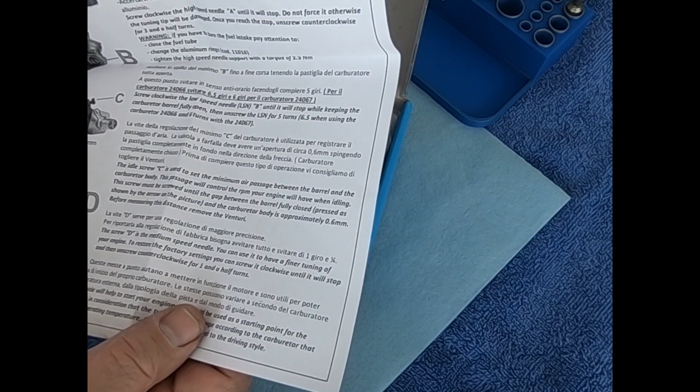This was opened previously, so let's get that out of the way.

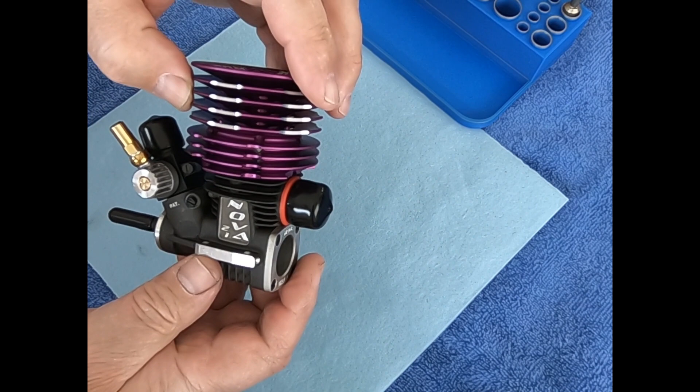It's a nice looking engine. I see it has the offset carburetor, six head screws.

I'm not quite sure why they go to six head screws. I'm sure it holds better, though I don't know if I've ever had a problem with four not holding good enough, but there could be a reason. The old 8-port Novarossi had that on some of the 821 models - some had it, some had the 4 bolt. That 821 was a really good engine, 8-port, but it had really good torque for a truggy.

Looks like the standard carburetor that's been coming with a lot of engines lately. Obviously it's a different block when it has the offset carburetor - you can see the carburetor's not centered like on most engines.

I don't know where the needle on this carburetor goes. This one looks to be really far in from flush - that's probably a starting position. Most Novarossis you kind of run flush on the end, so this one's a little different.

I see it says 7 transfert - that's 7 ports. It's probably just a little translation from Italian to English. So we'll get it taken apart.

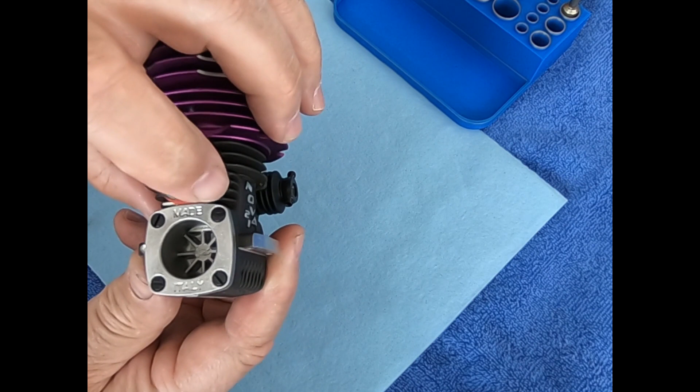With the Novarossis using flathead screws, it's really important when you're working on these to have a good screwdriver. The one that works for the backplate can be a little cheaper, a little smaller for those screws, but for the head screws you need to have a good one.

My good one I got at Fleet Farm - that's kind of a Midwest thing - but I think it's made by Wiha, W-I-H-A. It has a really nice hard tip, and it's the right diameter to fit down in there.

I've gone through a lot of screwdrivers in the last few years. It's hard to find a good one that lasts, because I wish they wouldn't use these - I wish they'd use a regular Allen head screw instead, because a lot of people have trouble with them. I get engines in for a rebuild and they're stripped, and sometimes I've had to actually drill - I have a little sleeve I use to drill the screw out if I have to. It's kind of a pain. I wish they would just go to a regular Allen head screw.

But we'll get this one taken apart and see what's inside.

Okay, I got the head bolts out of it, and it's time to take the head button off. Actually this one came off pretty good - sometimes they're really tight on there.

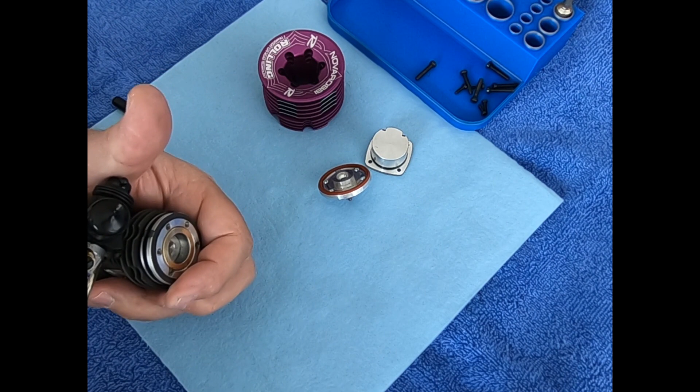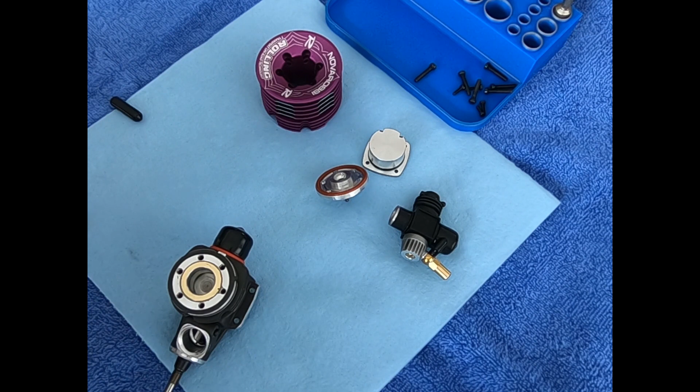And take the carb off here. Maybe the sleeve will come out - sometimes the sleeve with just a pinch will come out. This one didn't, so we'll hook the exhaust port here with the zip tie.

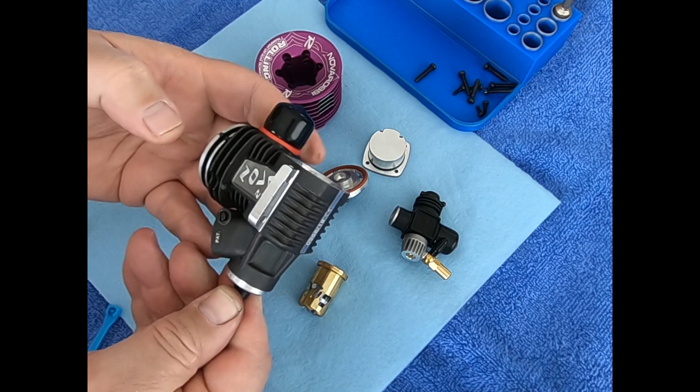Push it up - sleeve out, piston out, and the crank out.

So this has a weighted crank. Like I said on the head, it's a 7-port - that's counting these two small slits, the transfer ports, the boost.

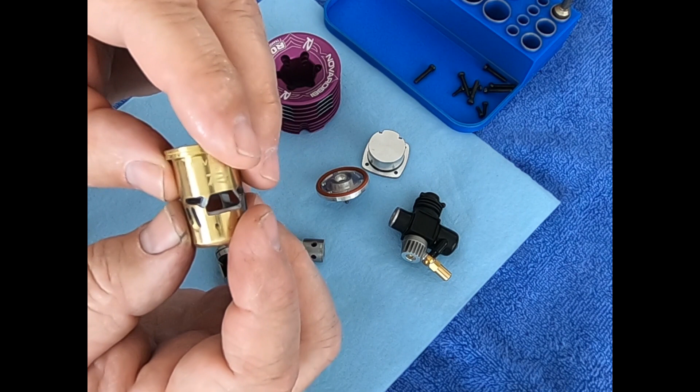Now this engine, looking at it, seems similar to the Bonito, probably the original super long stroke design. By super long stroke, this is a 15.9 diameter piston with a 17.6 stroke, so the crank has a longer stroke than most other engines - something like a P5 would have quite a bit less stroke.

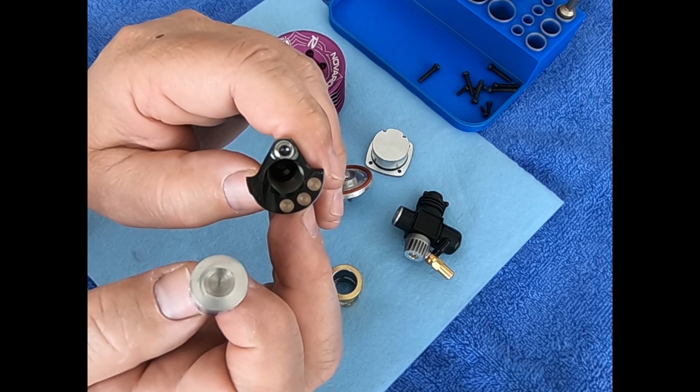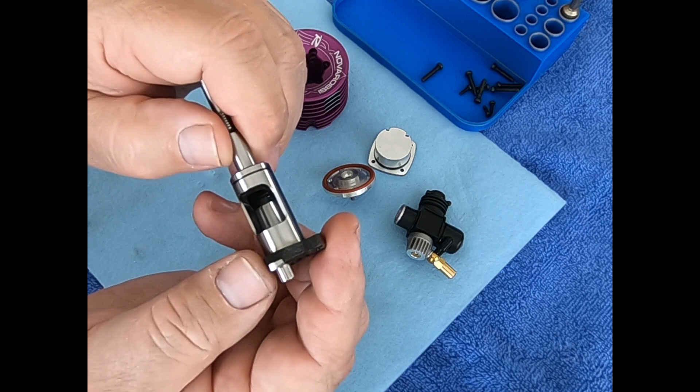This also has - I don't know if you can tell by looking at it - a 14.5 millimeter crank, like the kind of standard crank, whereas some Novarossis like the P5 have a 14 millimeter crank. This is 0.5 millimeter larger, which takes a different bearing in the block, but I don't know if there's really any downside to the larger crank.

I think it was originally made for their on-road engines so they could have a bigger bore in the crank. This one does have maybe a 0.5 millimeter larger bore in it than something like a P5, but again, like I've said on some of the other engines, I'm not sure what they're using for weight with the weighted crank.

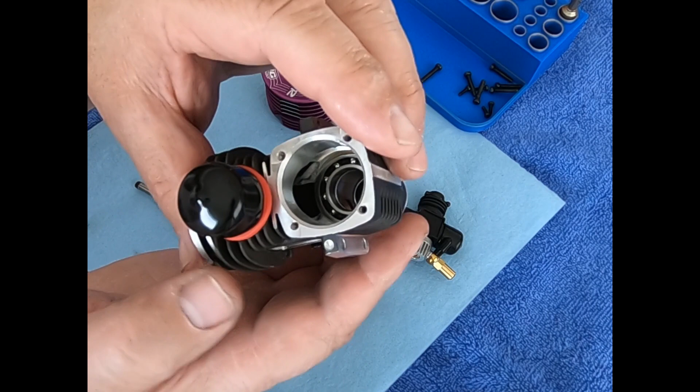Hopefully it's something that's heavier than the steel. This one is a steel bearing, steel rear bearing, and the Novarossi double sealed front bearing. I do kind of like that bearing. It's fairly expensive from the factory, but it has 2 seals on the outside and then no seal on the inside, so it does do a good job keeping the dirt out.

You still need to replace it, and it lasts a little bit longer than some standard bearings, but this one doesn't look like it has... yeah, this one has the standard rear bearing.

There's a couple things I don't like about Novarossi, one of them being they went to a special rear bearing, and the inner race is thinner on some, and then there's a boss behind the bearing. If you use a standard bearing, the inside and outside dimensions are the same, but the race is thinner, so you can't just put a standard 14.5 millimeter bearing in there. You have to buy the bearing from Novarossi.

There is a manufacturer, TKO, that makes a replacement. They're a little more expensive than some standard bearings, but about $35 isn't too bad. They make it for one of the sizes, but I can't remember which, because they do it on both the 14 and 14.5 millimeter cranks. So that's something to look out for.

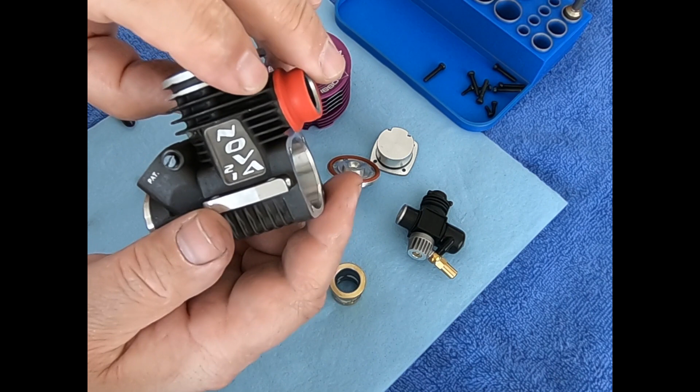This is kind of different—it's machined out right here for their logo. I'm not really sure why that is on that side. Like I said before, the crank, or the carb, is offset, and so the crank is different also. If you look at the crank, I'm not 100% why they did the offset.

I mean, obviously, you do something different, it's cool, it sells more. But I think when they first did that, it was on the on-road engines. My theory on that was you get a better balance with the crank because your crank window is kind of lined up with your crank pin, so the weight is better for the balance. You're lighter on the top side because you want your weight to offset the piston. At the bottom of the stroke, it's offsetting the piston, so I think they did it for a little better balance on road, high revving engines.

And then they already obviously got the blocks and stuff, so it doesn't really cost them any more to use that block for a different engine. Novarossi cranks are generally good quality—the crank pins wear well even on the uncoated ones, so cranks and rods are pretty strong.

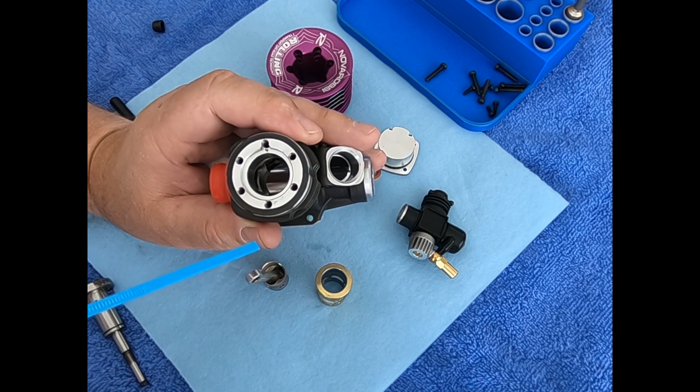I'm not sure what the part numbers are on these, but you can't take a crank from a different engine that doesn't have the offset carb and use it in this one—it has to be from an offset carb. One thing they do too is the notch for the sleeve on a lot of engines is either on the exhaust port side or the intake side. On these, to prevent you from using a different bore and stroke in this engine—I think the Bonitos are that way too—they offset it to the side, and it doesn't really affect performance. You just have to be careful when using parts from different engines.

Going back to the sleeve, I always kind of thought that was neat, the way they do the bypass port. If you don't know what a bypass port is—the piston's going up and down, and we're centered there—so the piston, as it goes down, lets air out from underneath it, and it gives it that little bit of relief since there's dead space underneath the piston otherwise. So as the piston's going down, the air comes out and gets in with the intake charge there. I've always kind of liked that.

There's a lot of engines that don't have bypass ports anymore—they're kind of getting away from that—but I was always kind of a fan of the bypass port. It's a little more machining, especially in this one; they're kind of relieving it there. It's a 3-port exhaust. There's pluses and minuses to that—it usually adds top end to an engine.

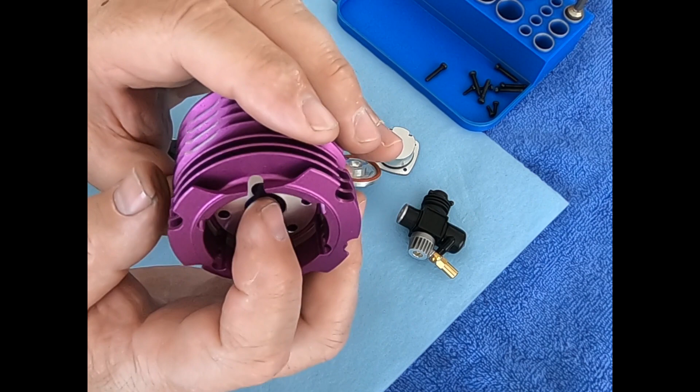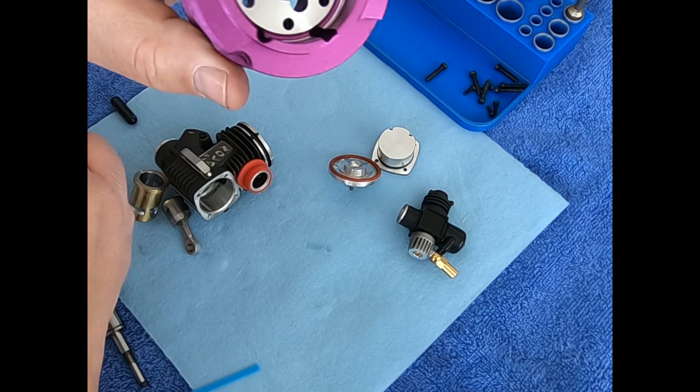Going to the head, this is probably one of the lower heads that Novarossi makes. They have some clearances cut in it for exhaust and carb side. Pretty nice, they're a pretty nice head. Cool. Nothing too fancy on the back plate here.

You'll notice the cut's a little bit deeper because the stroke is longer on this engine, where the piston comes down farther, so there's a little deeper notch in that. Going to the carb.

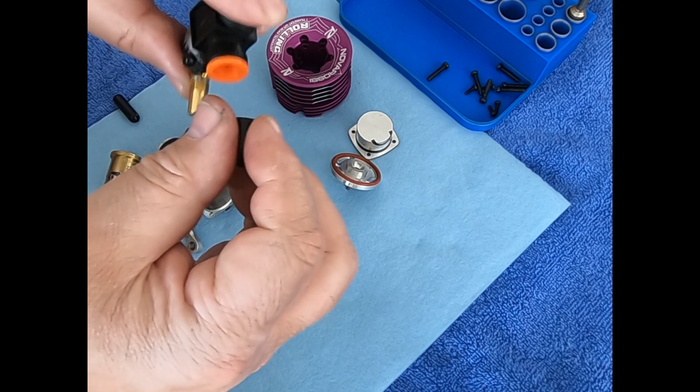7mm restrictor. Looks to be a long low speed needle carb. Pretty standard for the Novarossi. They look to have changed this a little bit.

Some of the older Novarossi carbs didn't have the third needle. That's just changing your spray bar adjustment. So if you were to screw this in a half turn, and if the thread pitches were the same on the low speed needle, it'd be equal to adjusting the low speed needle. Sometimes you can get the spray bar in a little bit more, so you need to work together with the low-speed needle, and there is some differences.

I have played with it on a carb before, and it did make a tuning difference, but it's not a drastic change. You're better off, unless you're really experienced and want to play around, leaving that alone.

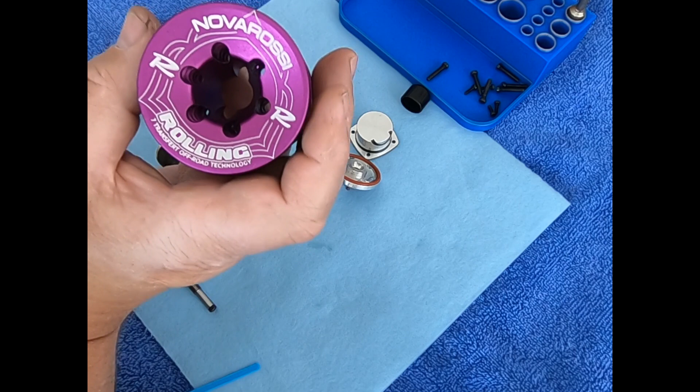Well, I guess that's about it on this. I did a little research. These I saw priced between $219 and $265.

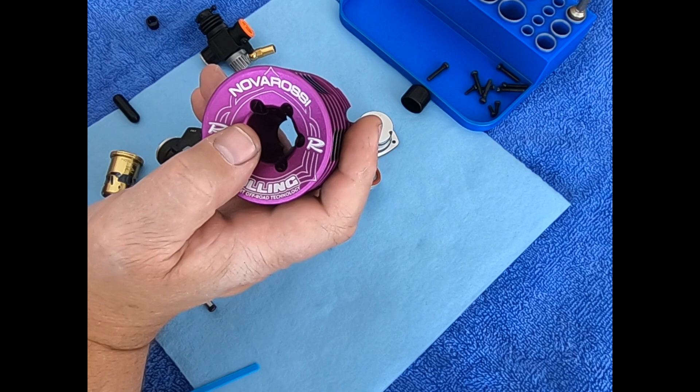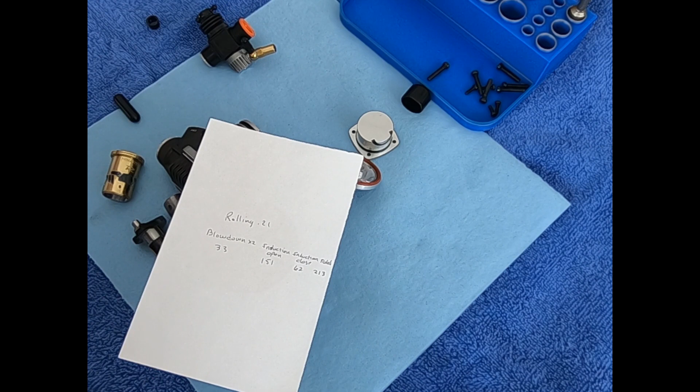This engine, to me, I guess we'll go through the timing numbers now. Some of the higher end Novarossis do have some nice induction numbers.

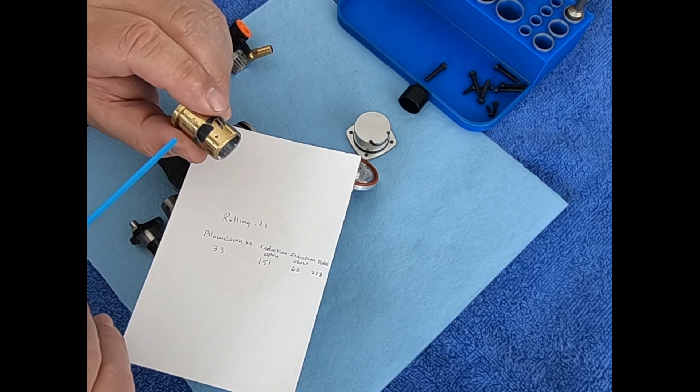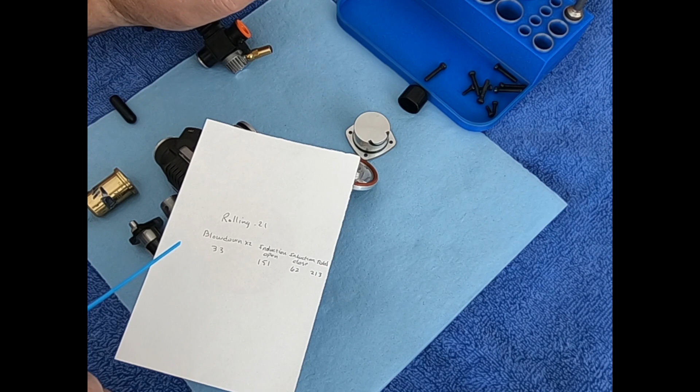So the blowdown, which is the degrees between the exhaust port and the transfer port - some people take that number times 2, but it depends on what program you're using. I'm getting 33 degrees on this engine, which seems kind of low. I like to be up in the 40s, but it does have a pretty wide exhaust port that plays into that too.

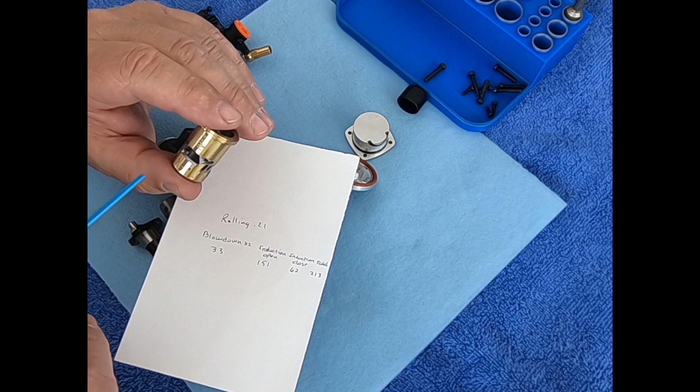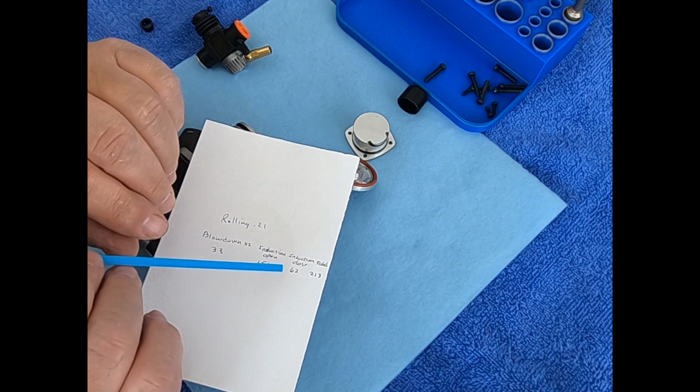But I like to see probably in the 40s with that. What that will do, you put it up into the 40s, will give it more top end. So this, as it is, should have just a stump puller. Opening is 151, closing is 62 degrees, for a total of 213, which is pretty good.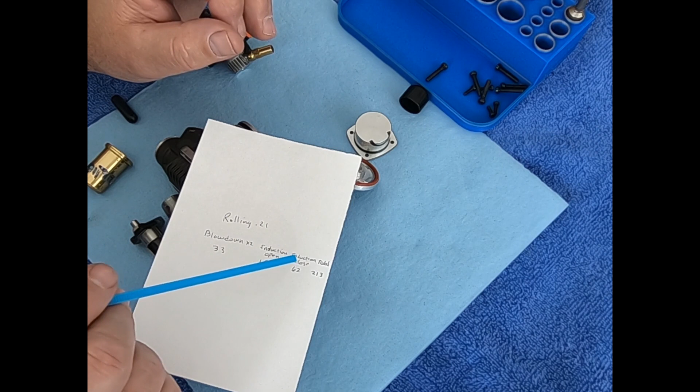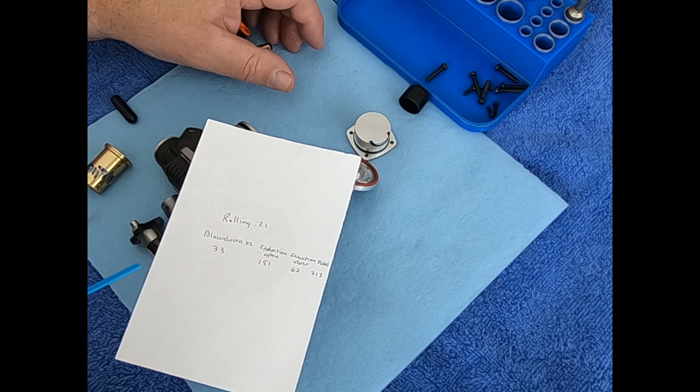I don't like to go much over 220. Some engines are up to 220. So those numbers, this engine with some modifying, I'd probably move the blowdown more than the other numbers, but they're pretty good numbers.

So going back to the price, I saw it was quite a range from 219 to 265. One thing I'd stated before, I wasn't real keen on Novarossi going to that kind of special rear bearing. It seemed like they were kind of trying to screw the customer a little bit, or get them to buy their rear bearing and stuff.

But another thing, like a few years ago, I actually used to be a dealer for Novarossi and had a dealer - the importer got engines through the importer and sold them. But a few years ago, they kind of opened it up to any importer, and I don't know how many they have now, but they had up to 3 different importers and stuff.

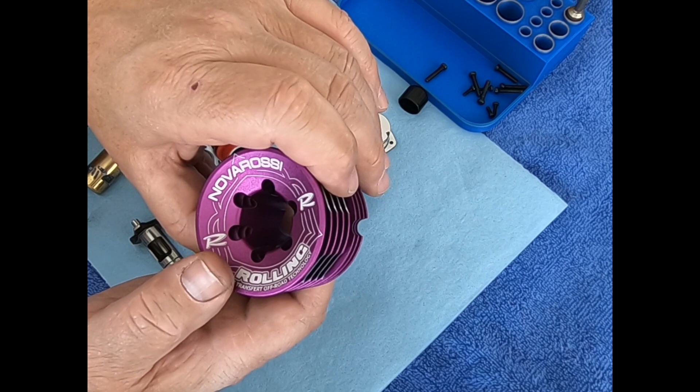Well, then there was one - I'm not going to name names - but there was one importer that basically, when I contacted them about a dealer price list, said they don't have a dealer price list, and that they sell online at dealer prices, which for some people is a good deal.

If I go to the track nowadays, if someone's not sponsored, they most likely run a Novarossi, or if they don't have an engine deal, because you can get them quite a bit cheaper than some of the other engines. They're Italian engines, pretty good materials, they last quite a while.

I really have nothing too negative to say about them. But it kind of changed the way engines sold in the U.S.

I used to be an importer for Argus engines. I used to sell Alpha engines, and then I imported the Argus engines for a few years. And then when I got out of selling the Argus, was about the time this Novarossi thing happened, because it was hard for me to sell even a $150 to $200 Argus Taiwan-made engine when you could buy a Novarossi for $130, $140.

So, to me, that's kind of when I quit importing Argus engines. Basically, the Novarossi distributors changed the way things work in the U.S. as far as engines, and there's probably fewer dealers because of it.

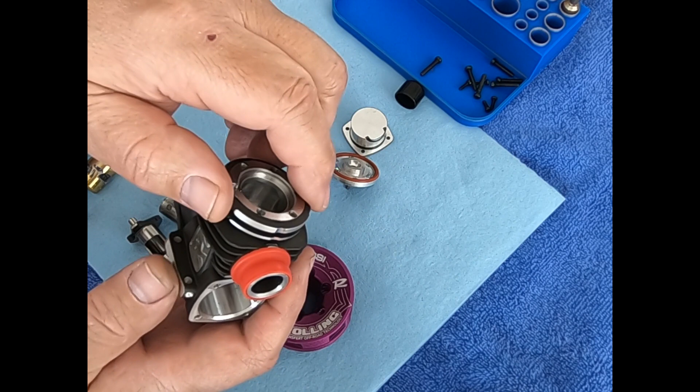Another thing I see online a lot is questions like which engine's for me. We got the Rolling, the Mephisto, the P5, Elite 5. If you're looking for a super long stroke engine, I'm not 100% sure, I don't run them much, so I don't really have an opinion on how they work. I do know some on-road engines have it. Is it more of a top end engine, or I've heard they're a torque engine for a truggy? They work kind of both applications.

But one thing I will say is a P5 on most tracks will have enough power for an average guy. Tune it with your pipe and restrictors and it'll be plenty. This engine at 220 to 265 is probably on the upper range. If you can get an engine for 150 or less, or get one for 150 or less and get it modified, you can tune it the way you want. So there's a lot of choices, especially in the Novarossi brand, and it's kind of hard to know which one is for you.

I will say this one has the offset carb. On the track, this thing is going to perform pretty much like a Bonito. The timing numbers are within a couple degrees on everything, so between this and a Bonito, if you can pick up the Bonito a little cheaper, probably go that route. Sometimes a ceramic bearing engine will be a little bit more money too.

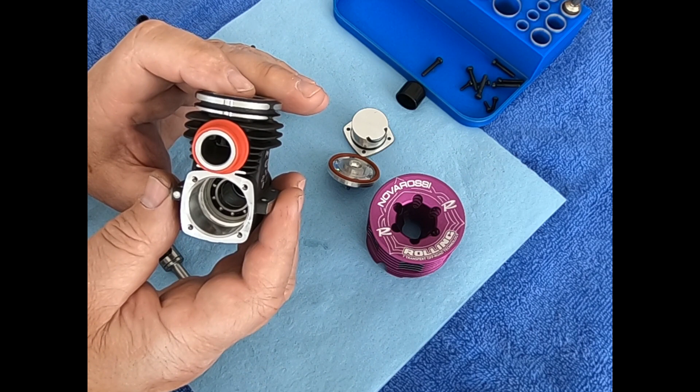Although, when I rebuild an engine, I'll put a ceramic in it because there's only a $10 difference in the bearing. But there's nothing wrong with the steel bearing. I've never talked to someone who replaced a standard steel bearing with a ceramic and said, 'Wow, I could really feel a difference.' Is it better? Yes, it's less rotating mass, a little smoother, whatever, but it's not going to be a noticeable difference. So I guess all in all, a good engine should perform well.

This one's going to get modified, and we're going to do some work on it. One thing I didn't touch on is a lot of Novarossis come with pretty tight piston to head clearance. So as the piston's at top dead center, there's not much squish band there, or squish on there. They come shimmed a little tighter than a lot of engines, but they also run a colder plug. This is a C7, so the Novarossi 7 plug is pretty cool.

So what that does is, if you were to replace this, I see some guys come in for rebuild with an OS P3 plug in there. Well, the piston to head clearance works well on the Novarossi, probably more towards 25%. I personally, if you're running 30%, I'd add a 4 thousandths shim to this, and then maybe run a 6 plug. You'll probably idle a little better, a little more low end. That's probably what I would recommend for this engine and most Novarossi engines. Not all, but most Novarossis come about 4 thousandths less than what I like to see.

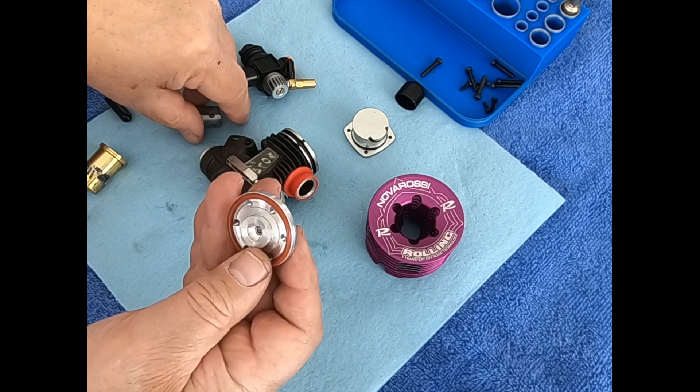If you're one that takes apart your own engines, you'll see it. You'll see pitting that looks like it's sandblasted. Now it didn't ruin the engine or anything, but when you take it apart, you'll see it's sandblasted, and that's a telltale sign you've had some pre-ignition. Basically, the piston's firing before it gets to the top, and it's kind of hard on rods, cranks, and rod bushings, because you actually want it firing as the piston's going down, and instead it fires before it gets to the top, so it's working against itself.

So if you notice a sandblast look, it can be either a bearing coming apart or pre-ignition. I think they tune a little better with adding a shim. Power difference will be negligible.